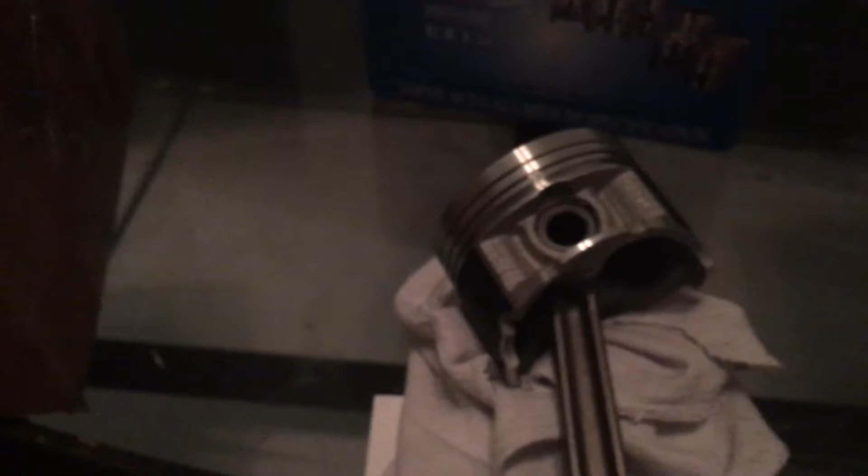Yeah, so I think the lighting in general, everything is kind of dim, so it's messing up my camera quality here. It's not that the camera's bad, it's just the lighting's not so good. Alright, maybe that helps a little bit. Alright, okay.

So anyway, for you guys who've been watching the B20 build or whatnot going on, this is of course the rods came back, the pistons came back.

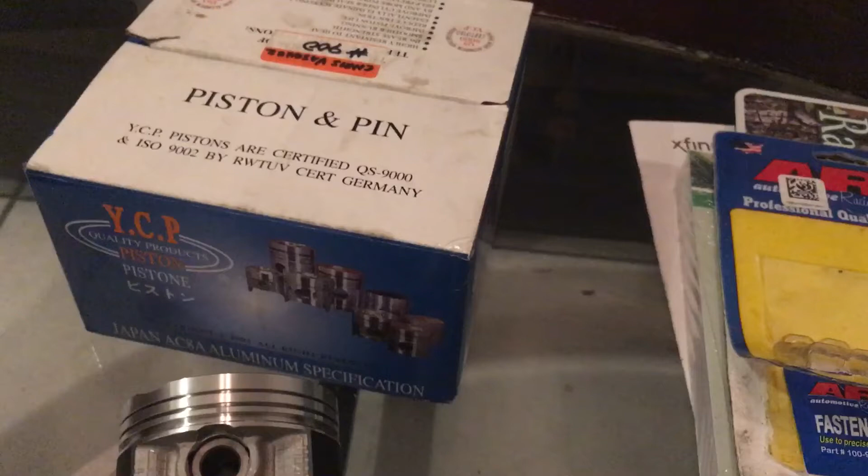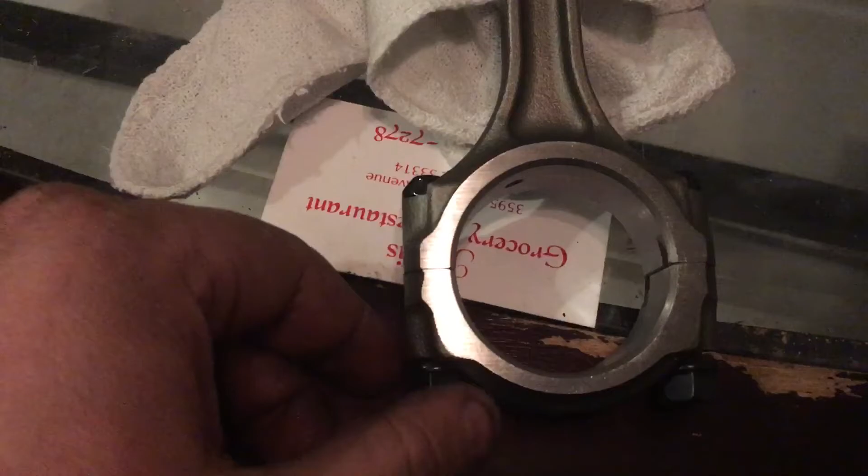So I kind of feel guilty for a couple reasons about this. When I decided I was going to press the pistons on through the machine shop instead of trying to dig out my press and transport it and do it myself, I figured, well, we're going to go to the machine shop to press it on anyway, so why don't I just grab some ARP bolts, $40 or whatever. I figured it'd be another $40 to get the rods resized or whatnot. It wasn't, it was $80.

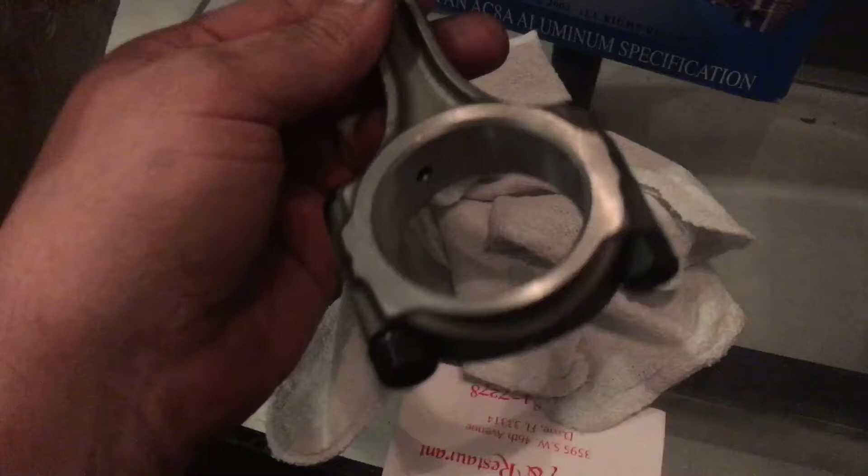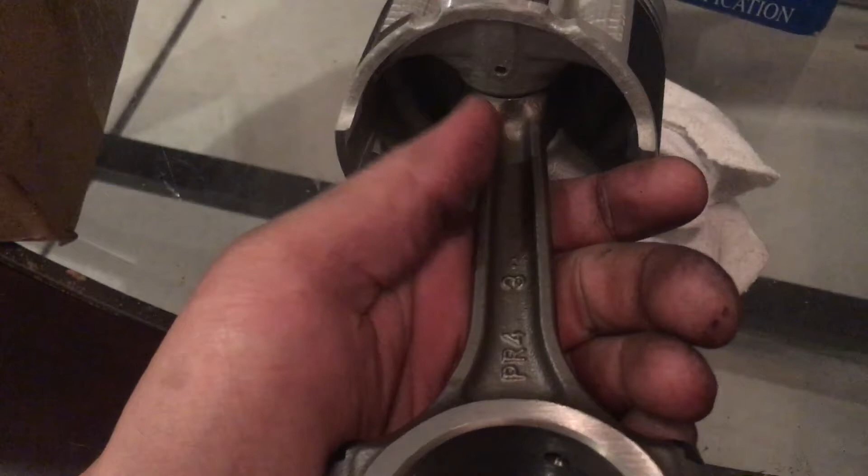But look at this. First off, we're gonna talk about the pros. Look at this, freshly honed and everything. Just looking at how clean everything is, it looks a whole lot like a brand new rod. This is the closest they've ever seen to an OEM brand new rod.

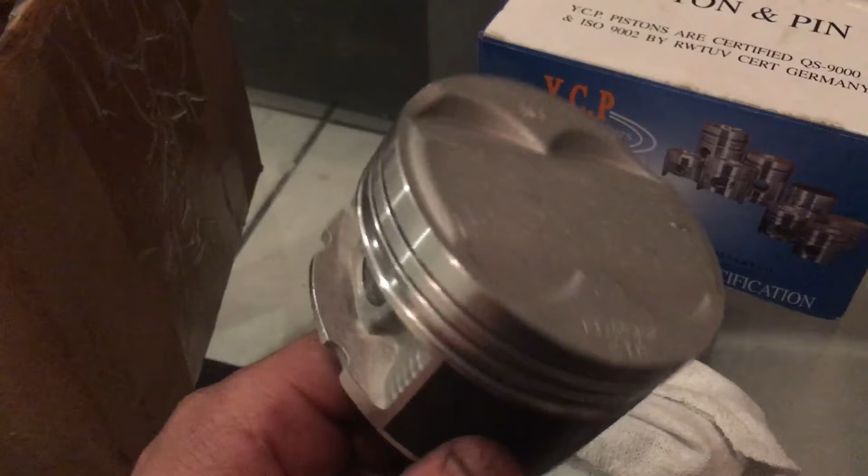Really happy with the results here on the outcome, and the piston is smooth, also like brand new, with the wiggle room and stuff. And because they wound up resizing the pin hole, I think it was like 0.001 off, they said, so they resized that a bit to allow for a good fit. And there's the rest of them. So yeah, I'm happy with what we got back.

Now here's why I was saying I kind of feel guilty about the whole situation, because I wrote this up today while I was at work. I wrote up a list of engines that I have right now as possible builds.

So K20A3, I got the 81.5 millimeter LS setup, Scat rods, Nippon Racing pistons, another B20, B18, CP pistons, Eagle rods, and then I got one more B18 that needs to be built for Brian Orlando with PR3 pistons, and I'm probably gonna have those pressed on too. Like you see the 128 here, that was the generic price the machine shop gave me for pressing on the pistons and resizing.

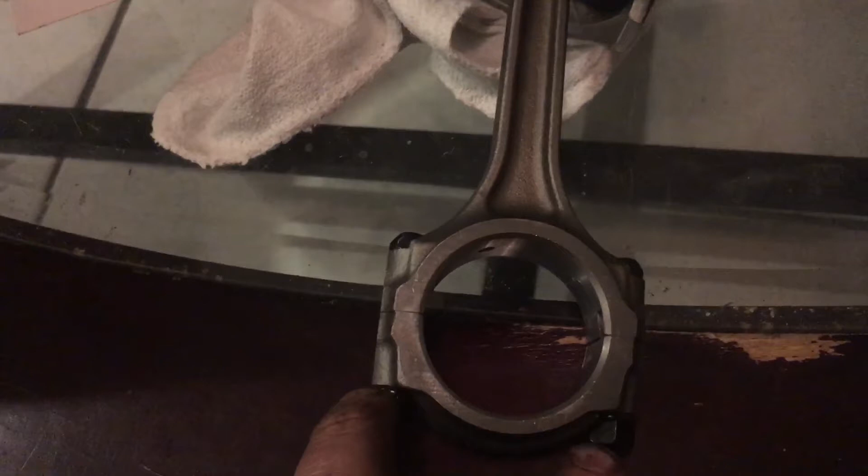So when I put the 128 as a total, I've already factored in ARP rod bolts, but I may be rethinking that. The reason is the total to get the rod bolts, like the rod bolts are $40, and the resizing of the big ends is $80. So that's $120 to install ARPs on stock rods.

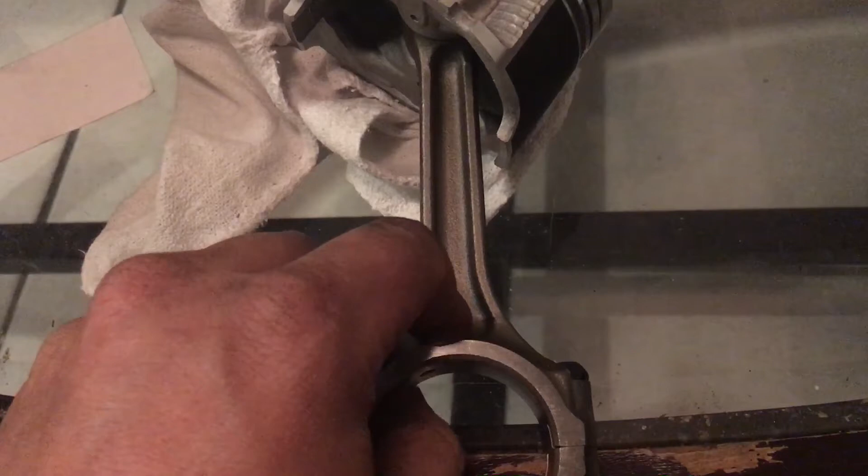Now, if you guys remember the review I did on those rods not too long ago, those $147 forged I-beams, I was like, that's only like $17 difference away from buying forged rods. Now, if anybody wants to say, oh, no brand or no-name brand, they're still forged rods, made out of the same kind of metal that almost all these rod companies make their stuff out of. And most of these companies aren't even made in the USA—they're importing their rods from the same sources and then putting their own stamp and brand on there.

So anyway, I think that instead of buying ARP rod bolts and having them resized, it's cheaper, or it's better off to spend a little bit of extra money and get an I-beam. So now I'm gonna rethink my pricing here, because these pistons come in two options: press fit, and floating. And I do believe their floating option is also able to be used as press fit, and it's the same price for floating versus press fit version of these pistons.

So my other B20 I have, nobody's ordered it for me yet, so I think what I'm going to do is buy those rods, and it'll save me money. Instead of being $328 to get everything I need for this build, it'll be $288 instead. So yeah guys, I'm gonna be getting those I-beams here pretty soon.

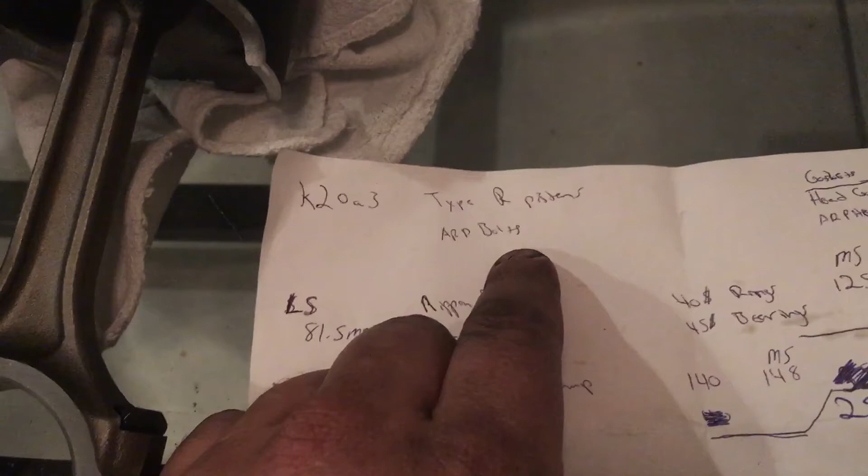And honestly, my biggest issue right now is I want to build one of these blocks to sell, but man, I want to keep them all at the same time too. So the K20A3, I decided what I'm gonna do for that is, because I don't have a rod option for the A3, I'm gonna go ahead and buy ARP rod bolts, get the Type R pistons, have the big ends resized or whatnot, and see how much I can get out of the A3 with those minimal upgrades.

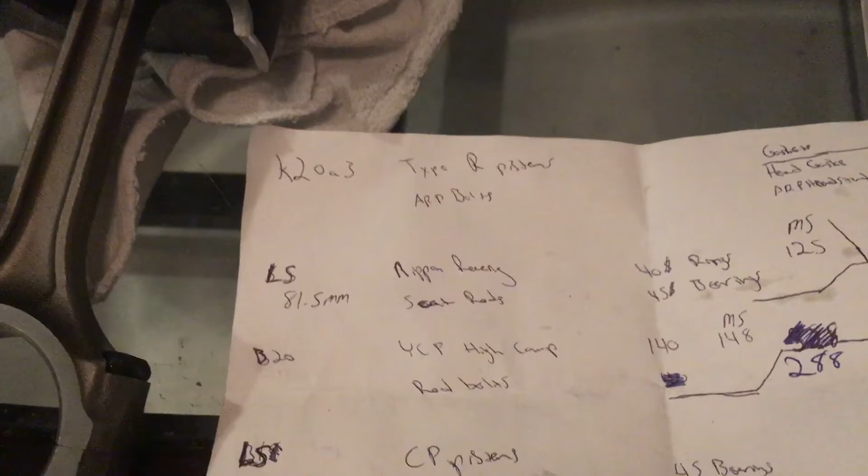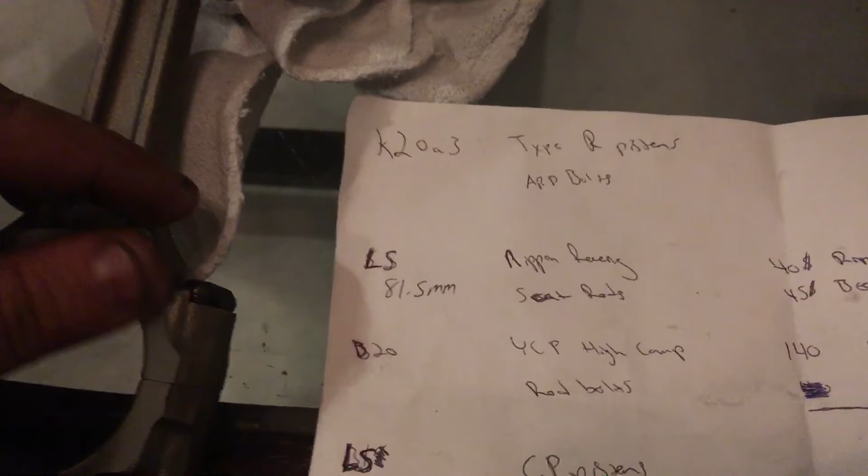I was debating on doing an NA build, and then I decided, fuck it, let me boost it. Let me just push it with those basic ass adjustments or mods and see how far it goes. So the A3, I'm gonna be doing that—I'm gonna build one of those for me.

81.5 millimeter. Oh yeah, the Nippon Racing and the scat rods. What I want to do is make a straight LS like I wanted to. I wanted to make a straight LS block and then run non-VTEC boost. So I'm gonna do that.

So these two I'm gonna keep. The B20 I want to sell. I'm not going to be in a rush to sell it, but this is for sure going to be the one I sell off. The CP piston eagle rod combo, I'm going to sell that one too. And LSPR3, that's not for me, that's for Brian.

So these are two blocks, the B20 and the B18 with the CPs on eagles. I can build both of these like now. But I gotta buy all the parts and everything, and I'm also in the middle of probably buying a second car.

I was gonna start buying all these parts for a couple of these engines now, but I have to buy another car this week, and I'm looking at like a $1,500 EK sedan with AC and power steering. It's already lowered, but otherwise stock.

Anyway, just a little quick rundown here on some future builds, what's going on and whatnot.

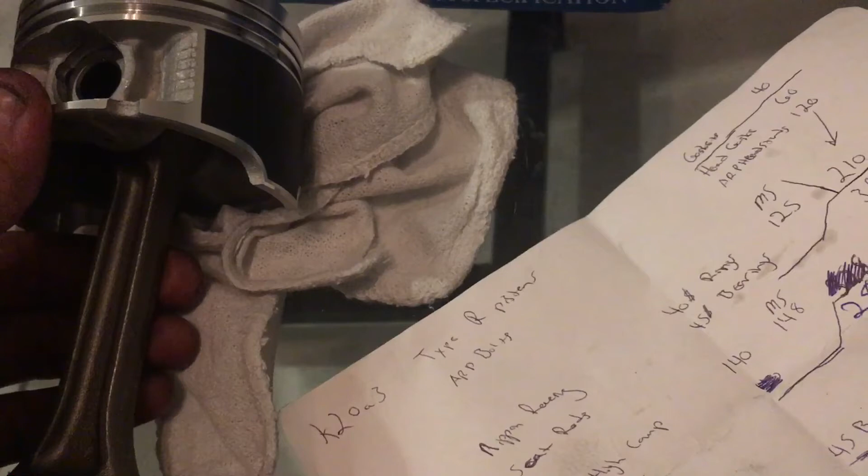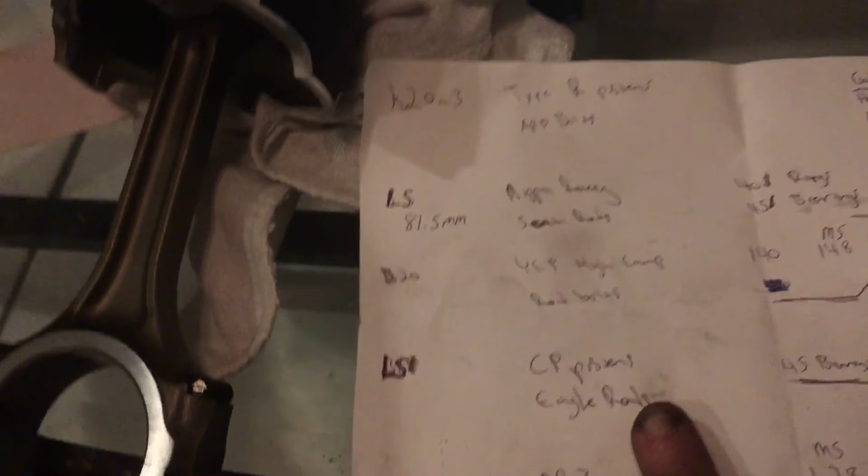Right now I am debating whether I'm gonna do anything tonight. I'm super fucking tired. Work, the real job, the main job, has been kicking my ass the last couple of days. It's been like 90+ degrees. My body is still reclimatizing to the warm weather, so I'm not going at the pace, or I'm working harder in a hotter environment.

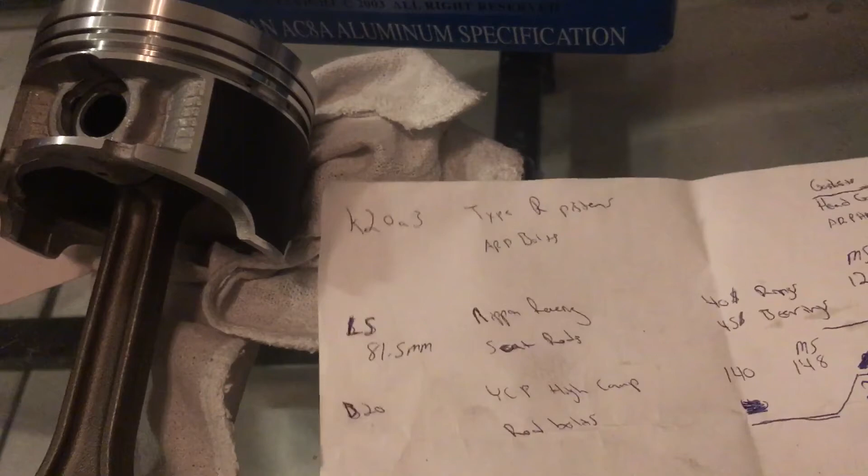So I don't know, I think I might just chill out tonight. We'll see, or maybe I'll just go check the rings real quick and see if they need to be gapped or whatnot, and go from there. I don't know, we'll see what happens.

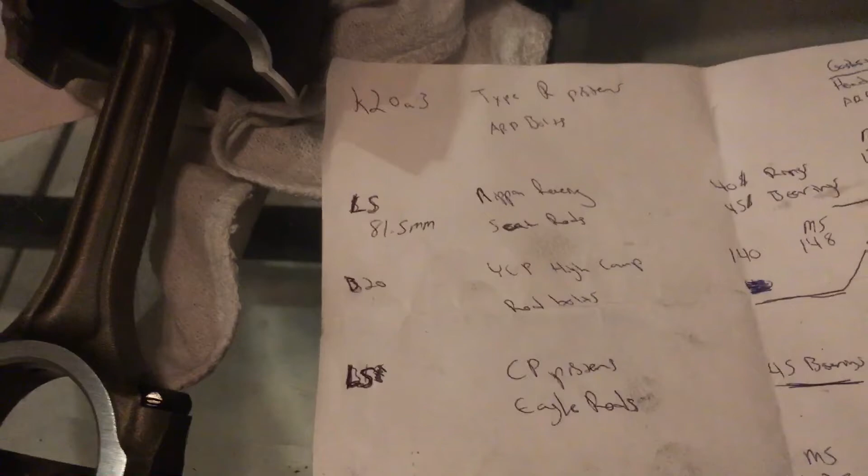If I don't finish putting together the block tonight, I'll probably just put it together in the morning, because if I go to sleep now, this is hours earlier than I normally would. I'll just wake up earlier and do it. Normally I wake up an hour or so before my wife comes back from work, and I just kind of sit around on my phone. So maybe I'll do that in the morning instead.

Oh yeah, if anybody is interested in the B20 or the CP Eagle, this one's going to be expensive guys. This one right here, I haven't really decided on the price yet, but I'm thinking of a high one. This will probably be your best bet if you're wanting something that's cheaper.

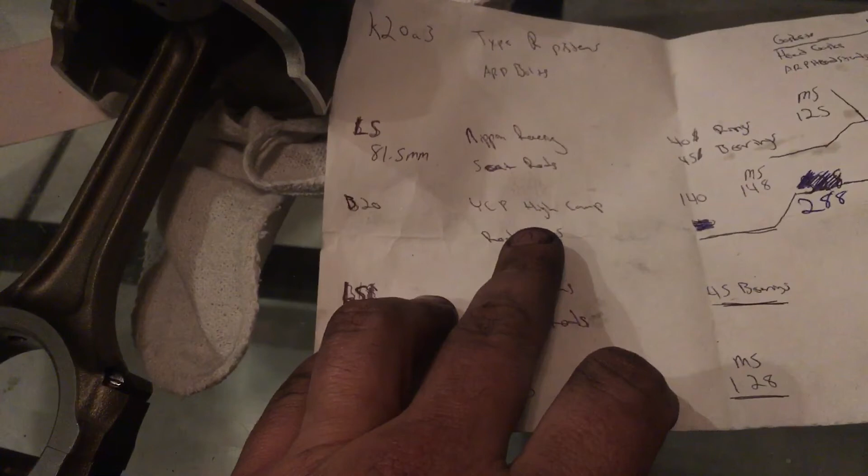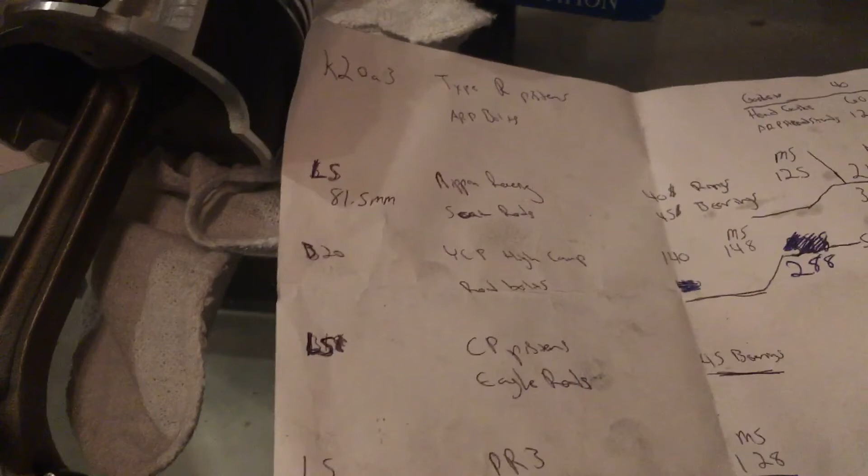Like I said, we could do it like $1,250 shipped, meaning you give me $600 up front for a deposit. I start getting the parts together and start putting the block together, or we can just do it the other way, where you do the core deposit and then get things a little bit at a time. Anyway, it's just an idea.

No big rush. If nobody else wants to get anything right now, I'm kind of hoarding and being greedy with all my engines. If it turns out I wind up with a whole bunch of engines, maybe I'll just use those to start building my little team or whatnot. I don't know man, it's just I'm trying to juggle the things.